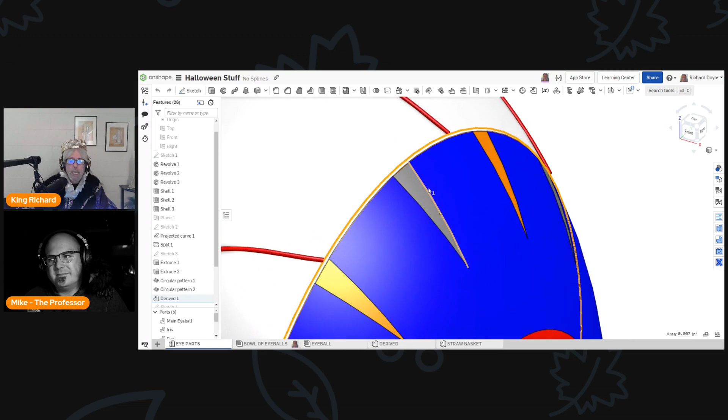He did the same thing for me here. You can see just that little piece of - I'll call it construction geometry - that pulled together all of those. So I learned quite a few things, including projected curve using this.

So it was a lot of fun to do, and I certainly hope that by next Halloween, I'll have a nice rendering of it and figure out some way to make these eyeballs shimmy. That's awesome, I can't wait to see it.

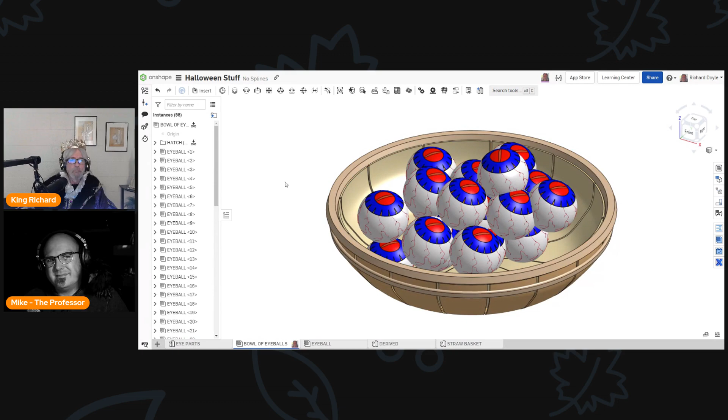That was my try at the challenge. Hopefully people appreciate at least the effort I put into it. Yeah, Poe does - Poe likes it a lot, and Poe says you have a great eye for detail. Ah, excellent, thank you.

I also just real quick would like to talk about Halloween for a minute because I love this holiday, particularly when my kids were younger - as a family we really got into Halloween. Let me just show you one more thing here to try and - I had this all prepared and ready to go. There we go.

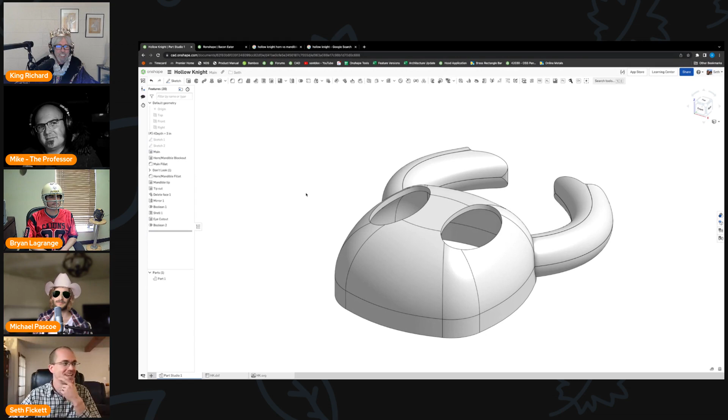Sure. So this is a mask to look like a character from a video game called Hollow Knight. It's a video game that my now 4-year-old son enjoyed watching me play from time to time, and he hadn't really had a plan for Halloween, and neither had I. And then the day before trick-or-treating, I thought, well, if I do this just right, I could print off a mask for him just in time. So I whipped up this model. You can see that I used some last minute move faces to get things right, and it's not a clean model, but it did the trick.

We were able to get it printed off. I've got the real deal mask here with me. Let me hide the screen here for a second so everybody can see, and I'll put you in the spotlight. What did you print that on, Seth? It was done on a Snapmaker. Me and a friend both have a Snapmaker, and actually he had his set up for printing, so he did it for me. It took about 10 hours. We had about one shot, and it came out okay, so we went with it.

Yeah, it looks fantastic, like a production piece. The white he happened to have turned out really nice, looking kind of bone-esque, which works for the aesthetics of the game. I don't know if I had completely thought through just how perfect a costume it was for a toddler, but the proportions of a toddler are just right for this character. The short little arms and big old head work out great for a toddler costume. So that's awesome, very fun.

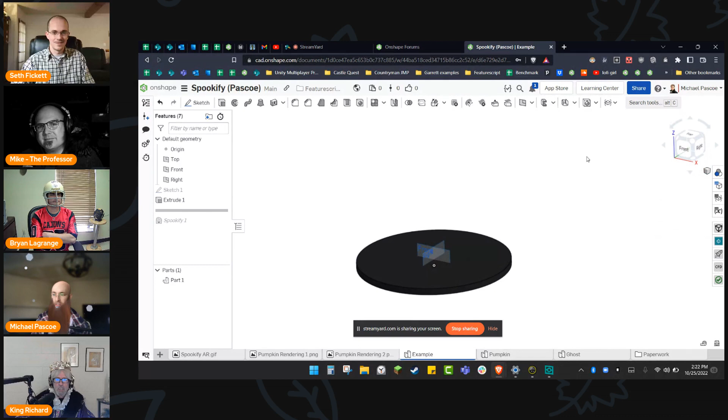I mean, this is a great use too. Well, while I'm here, I'll go ahead and show it.

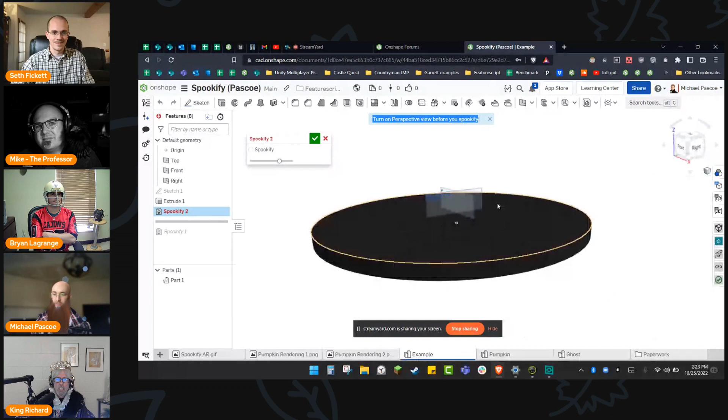So let's see, it's free on the forums. Spookify automatically grabs your model and stuff. The only reason I have this checkbox here is to let you know to go turn perspective mode on so this will work a little better. So I'll turn perspective on - now it kind of has that more realistic feel. And then you tell it to Spookify.

And it generates all these parts around your model, kind of like it's scaring it. This is very Tim Burton looking.

So with the AR, it's really cool. Let's see, where's this Halloween costume challenge? I think it's in the What's New post. No, it's in general. Okay, here's general. Oh, there's one of them. Here it is. Wait, no. There it is - a lot of forum activity to sift through.

Yeah, that's amazing, I can't wait to try out something like this. I ran out of time today to come up with a little VR AR Halloween thing, but this takes the cake right here. I love this.

Surprisingly, this little disc I drew in the studio was the same size as my stool, so I didn't even plan for that. It just popped right on there. That's awesome. Yeah, so that's what I had.

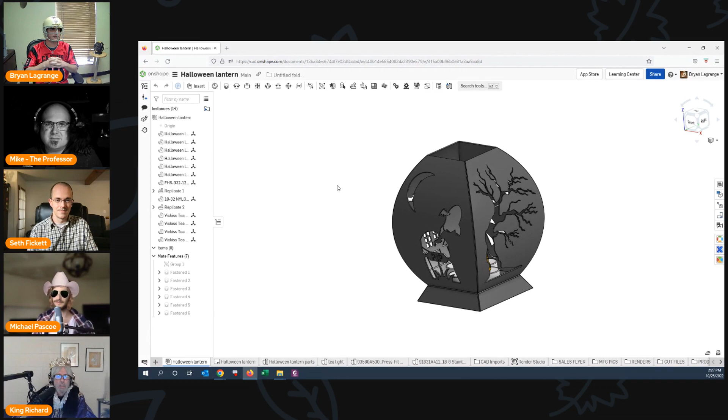So what I also want to do with this, since Onshape, you can have more than just the Onshape document in the document. So I took some photos of it going through different manufacturing processes, starting off with the design here, and this is, of course, the assembly with everything.

I'll just switch it over to the parts studio real quick. It's done in sheet metal in Onshape, but it takes a different approach. I started with a full solid of the shape, instead of trying in old CAD, or desktop CAD, where I used to try to make the shape in sheet metal and then start using cuts and everything.

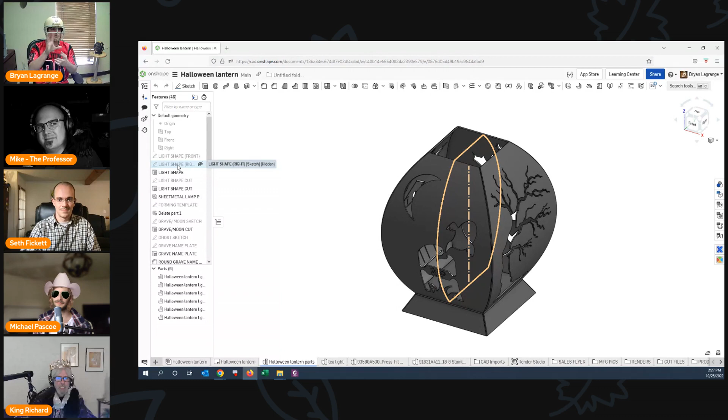But with Onshape and the parts studio, you can make that shape and then convert it to whatever thickness you have in the template, and that's kind of what I did here. It gives you some nice, tight seams to weld and everything. The other thing is, of course, on the flat pattern - let me turn it to the actual lamp parts.

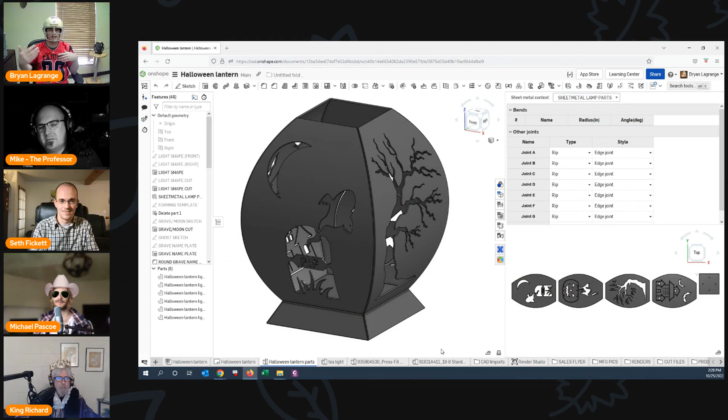You don't have to project these images or sketches, so you don't have to work in 3D. If you have a 2D sketch or anything, you can go straight onto the flat pattern. Let's see if I can just call it that, with the tree, the house.

So you sketch directly in the flat pattern window there in the corner. That's what happened. And of course, you probably imported some geometry here. I did some images, had the image off to the side and just kind of freeform, mimicking on the sketches.

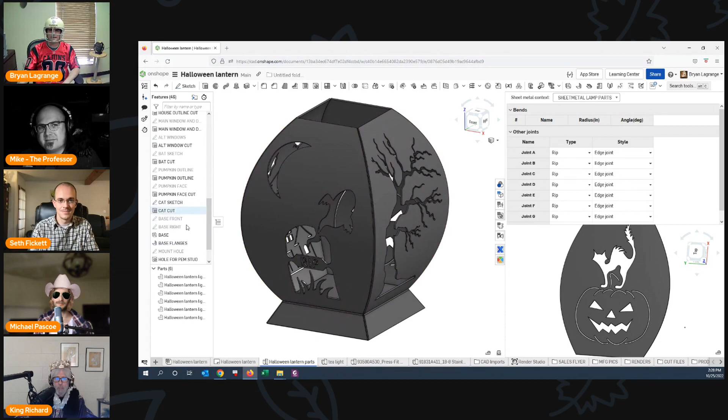But like right here for the cat and everything - I'm really impressed with the cat. That's cool, and the pumpkin face. I'll say I had trouble with the tree, so this was a trace that I kind of modified, and a little bit with the cat. But the pumpkin, the house, the graveyard, and everything, I kind of just did that by looking.

And that's just with regular Onshape sketching? You can do this? I never would have thought that this could be possible - it takes a while. And a lot of patience, I would imagine. A lot. I had some time.

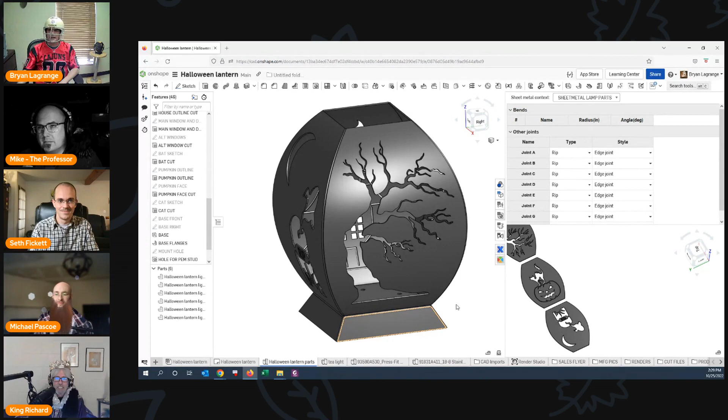This was just like a side project I would do at home. So I'd sketch some arcs or use a spline and just kind of look and place it. And working in the industry for a while, I kind of know what tabbing I was looking for, and what spacing I need to make sure it holds, because it's flat right here, but I have to roll it to shape. If you don't have the correct tabbing and everything, it'll pop, it won't roll.

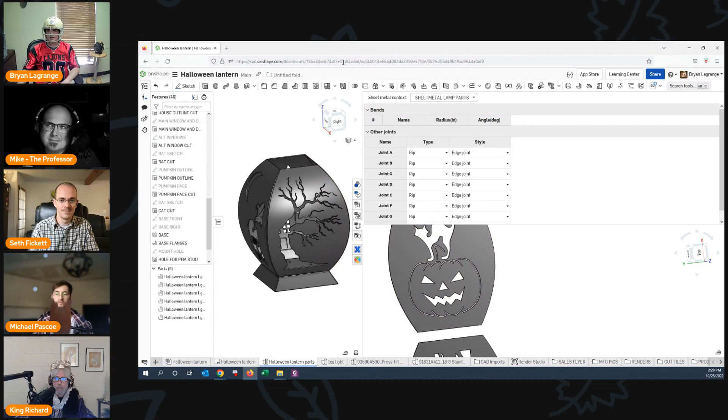Luckily, I have over here a small hand slip roller that I was able to use. So in the folders right here, I made a folder called manufacturing pics, so I could show - like this was straight off the laser cut, the flat. And then this, of course, is after I rolled it in the slip roller and bent it, and also pressed some pem studs. And then we have some of the best TIG welders, because welding thin aluminum TIG, you'll get a lot of fabricators that will be like, oh God.

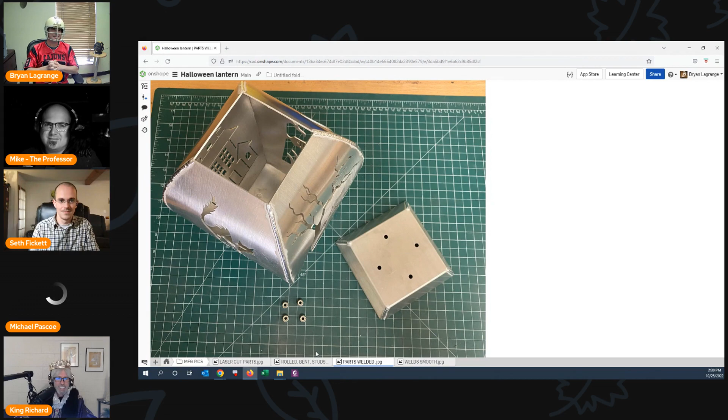But we have some of the best, and my God, he just took this and was going to town with it. And then, of course, we smoothed the welds out, and then I painted it flat black.

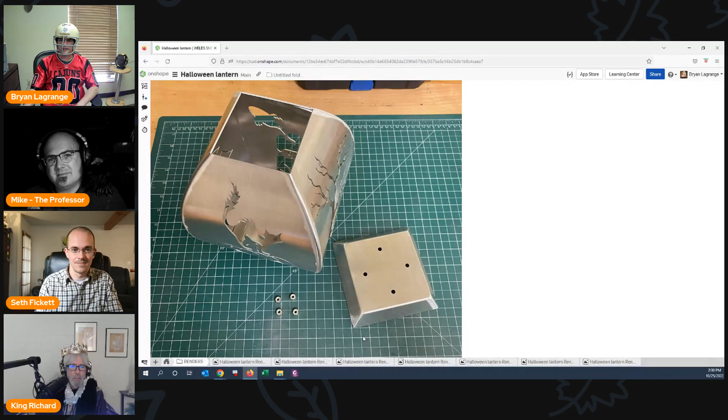And then, of course, I did also some renders. The render studio gave me the ability to look at it, like how will the lights, how will it see? It's pretty close to what we have, because I picked an amber color type light, and we got some amber color LEDs on there, just to get it.

And then, of course, I had some final production pics of it. Like I said, it's pretty close to the actual. I think it was over here when I got into the dark, and tried different colors - green. Yeah, you see in the dark, it actually had that orange color, just kind of like the render. It was almost matching. I was like, wow.

Cool, that's pretty sweet. But yeah, that's kind of what I had, and I just wanted to take you through the document, through the different processes that we did over here, as far as the design, the cutting, making all the files, and of course the drawings.

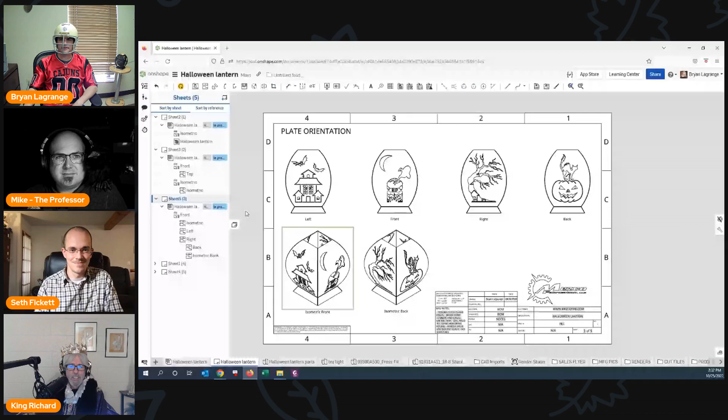I even have a file here called cut files, that's where I made the individual DXFs, but also manufacturing drawings of the BOM, where I wanted welding, kind of the general overall size. Even in the drawing I put, okay, here's the orientation if you want to place it, and then the individual different cut sizes. And then of course I did make a little template, so as I rolled it, I put each part to make sure it followed that curve that I wanted. And then of course created in the cut files folder the individual DXF files that we sent to the laser cutter and cut it.

This is a really good demonstration here, Bryan, showing the whole process from your design to testing the rendering to actually creating it. You're showing us the DXF output of the flat patterns right there inside of Onshape. A lot of people don't realize that's a possibility - you can just store the DXF file right in the document.

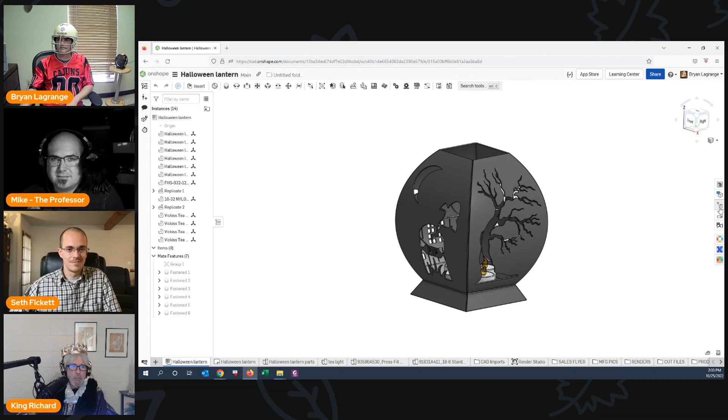You have it there, ready to go, under version control now. So when you send it to the laser or whatever, you have it. That was one of the things—not only to make something Halloween themed, but I thought it'd be a great opportunity to show how you can do a whole manufacturing process all in one document. It's just amazing. I know all of us here know that about Onshape, but it's something people should understand. You don't have files all over the place, on your hard drive, or in your PDM server. They're all right here, and he's included his drawings, renderings, and pictures.

It's a complete package in one document, and that's just amazing. Bryan, that's an awful lot of work for something that you needed for the lobby. Sometimes they say I go a little too far.

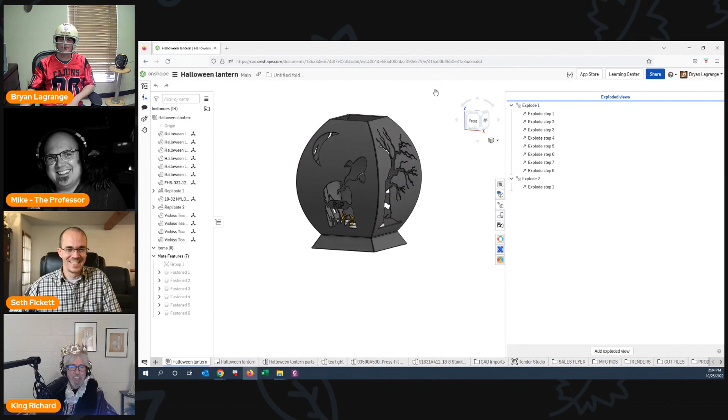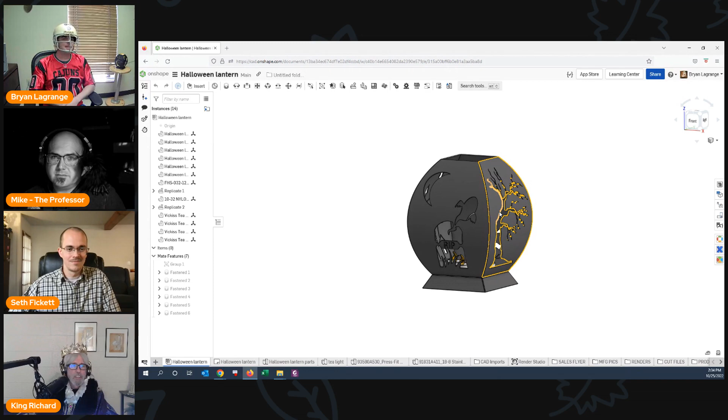I find it's fun, especially projects like this, where I'm not really constrained. I deal with customer work all the time, so they set the constraints. Sometimes I just want to make something for myself, or for the shop, and pretend I'm the customer. You're preaching to the choir here, because I'm not designing my tiny house in Onshape for money. You're right, it's for fun. Right, so at home, when I'm working on projects like this, sometimes I get caught up and don't notice how the time's flying.

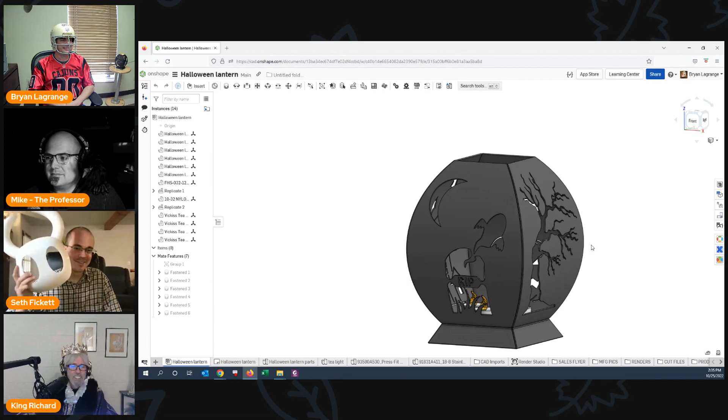And my son didn't give me a dime for this. My wife's hollering, supper's getting cold. Gosh, you didn't even get like a world's greatest dad mug or something? Well, he thought it was very cool. He gave me lots of appreciation, which was all I needed. That's even better than a dime. Absolutely.

Well, yeah, those were some great examples of some great work there. That's just awesome, and every single one of those beats my bowl of eyeballs by 100 miles. Good work, guys, and I hope someday I'll be at that same skill level with Onshape that some of you folks are.

All right, so I have some other kind of scary stuff I'd like to share with you. We'll have a little fun with Onshape versus maybe some of the older, creakier CAD systems out there. It's Halloween time—there are things far more frightening than the latest Halloween monster movie. In fact, before we go, we should all share what the last scary movie we watched was.

All right, let's talk about crashes. Every one of us has experienced a crash in a CAD system at some point in our lives, I'm sure. Nothing makes you wish more for decapitation than losing your work to a computer crash. It's totally impossible for developers to test every possible combination of hardware and software out there. That's why the problems are really inevitable. Software developers, good as they may be, can't test for the trillions of configurations of drivers, graphics cards, OS, and antivirus software. So crashes—they happen.